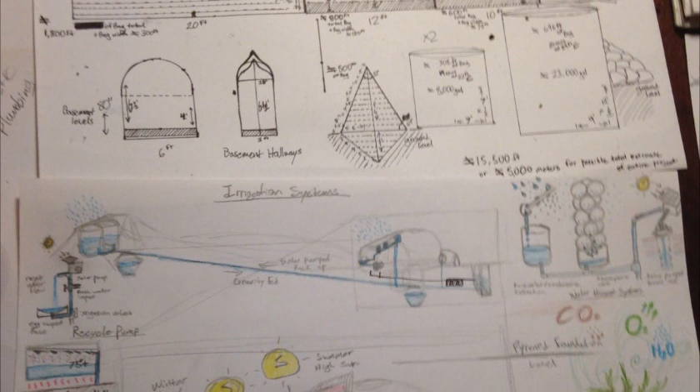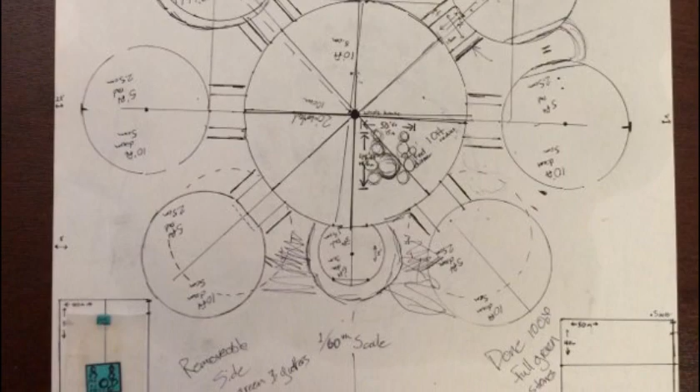Later we had started a scale blueprint that we wanted to be much more detailed, since we were hoping that this would end up becoming our final house. This is about the same time that we started going to Cal Earth as students. We learned the principles of the arch. We got some experience behind using the bag method.

We actually learned a lot from some of the older structures on the campus. They were built in the same way that we were learning how to build, and some of them were 8 years old, unprotected, and still standing. Anyone can help with this building technique.